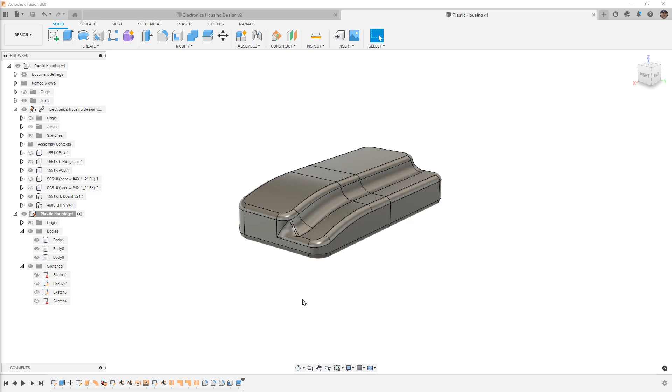In the last video, we did some concept work and played around with some shapes, and I talked about different ways we could use those to build our final design. Essentially we wanted to see how the concept phase could help us make changes and move the shape around until we got to a design we were happy with.

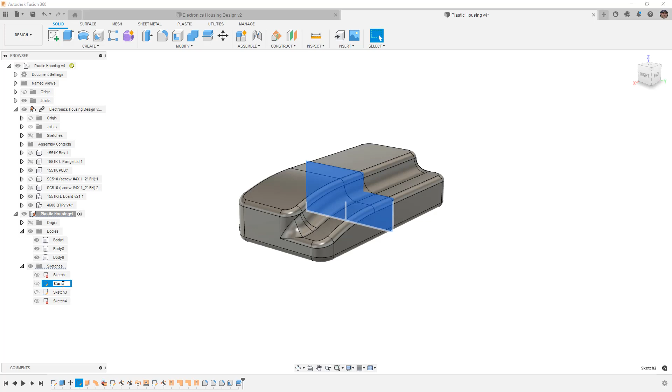But as I mentioned, we're not going to be using any of that concept work. So what I'm going to do is rename the different sketches to make sure we understand these were concepts. I'll label them concept 1, 2, and 3.

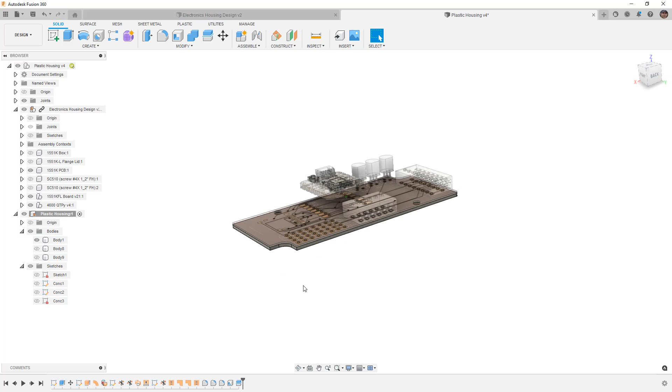Then I'm going to make sure I hide the bodies and hide those sketches. The one body left behind is the PCB, which we can keep if we want, but it can also be hidden. It's a good idea to rename it PCB.

And then I'm going to call this concept 1 and concept 2, just so I remember those bodies are there and they're part of the concept.

Now that we've played around with the concept phase and different ways to realize the shape we want, we're going to make a shape and talk about the actual plastic features that are needed.

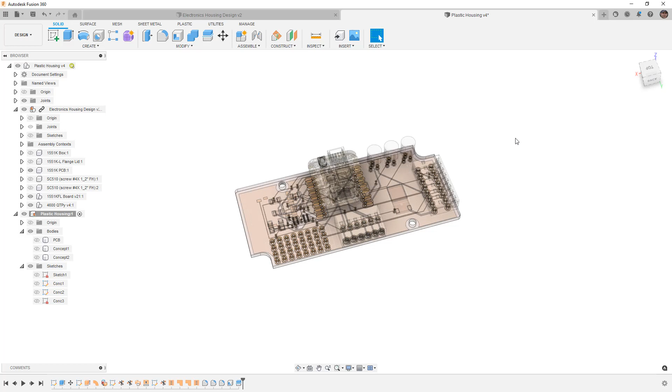When we look at this from the top, we have a PCB shape that we already know we're going to use. You can see we drew it over here and moved everything so that our origin or coordinate system would be at the center, and we have that PCB board.

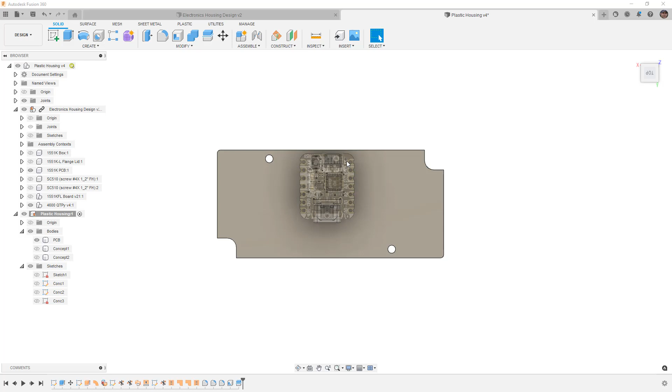So we can hide the actual board so it's a little bit cleaner. Note that we have the microcontroller, the Adafruit QT Py, in here, and we're going to need that information as well. But for right now, we can also hide that.

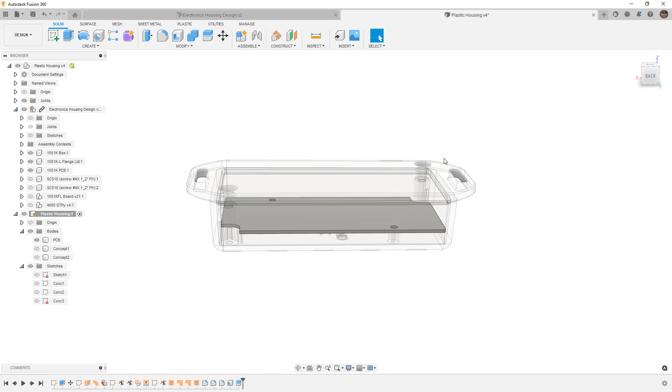What we're going to do is focus on the base of our design. We already talked a bit about the Hammond box we can get, with the lid and screws going down into this big boss here. What we could do is replicate that, or flip it around.

It really just depends on how you want the board and pieces to be used in the real world. We know where connectors are, we know we're going to need an opening on these two sides, and we know the QT Py has a USB-C and this quick connector.

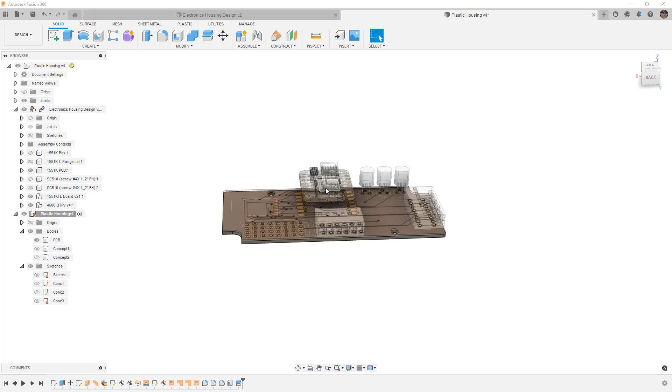And there's also this little reset button, so it might be helpful to have access to either put a screwdriver in from the side, or a little hole we can press down from the top to reset the board and restart it. So those are design considerations we need to be mindful of.

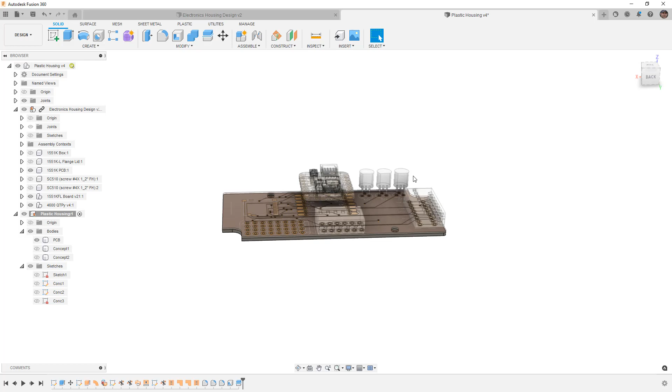This side of the board has the larger components on it, so we need to be mindful of that. The other components are all relatively small and minimal - there are some resistors and things on the bottom, but everything is pretty minimal except for this microcontroller and these transistors we need to worry about.

So when we look at this, we're going to get started. First I'm going to hide that and focus on this clean representation of the board. This is going to be the starting point for my housing.

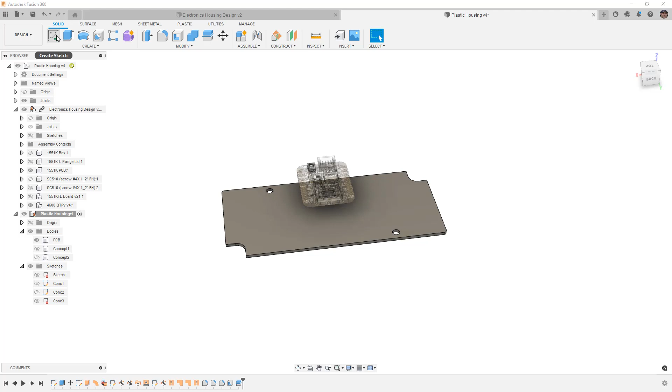So I want to start a new sketch and create it on the face of this, using it as the basis for my design. Remember I have the origin here, so I can use a center point rectangle and bring this out to make sure I encompass the entire board.

I don't know the dimensions I need just yet, but I want to use this and offset from the board a certain amount. So I'm going to use my dimension tool and just pick an amount that looks okay. Remember, we can make it as big or as little as we want, but making sure we have dimensions to drive it will be the important factor.

So I'm going to say 3 millimeters, and we can also create a user parameter or a variable at this time if we wish. For example, if this was board offset—oftentimes someone starts to type something, they want to simply do board offset. If you do the name, remember we can't have spaces, but we can use an underscore or capitalization to break words up. If you do the name and equals 3, then we've created that parameter.

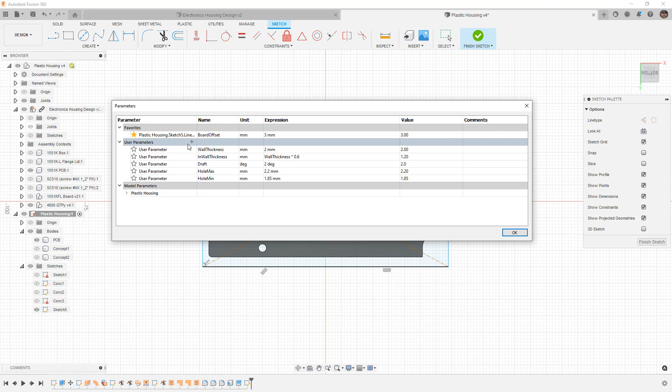If we go into modify, change parameters, you can see in our favorites it's located in the sketch. It's not at the top level in the user parameters, but the name is board offset, and now we can use that over and over again.

So in here, D on the keyboard to dimension—what we could do is click on this value and hit enter, and it'll be linked. Because we're using a center point rectangle, that's all we need, just those two values. We could also simply type in board offset; it would work the same as it does with user parameters.

Now that we have this base sketch, here is the time where we need to start making some important design decisions. Obviously we're not going to have square corners, we're going to have rounded corners. But do we place them as fillets in the sketch, or as features in the timeline? There are reasons why we'd want to do one over the other.

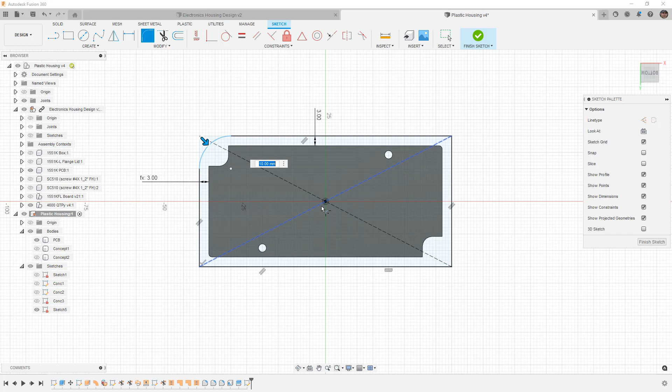If we try to use a fillet in here, keeping in mind that our center point rectangle is based on things like parallel relationships and equal distances offset from this board, notice this is going to affect those construction lines. So if I say okay and add a 10mm fillet, you can see this is fully defined, but now I get this 'constraints and or dimensions were removed' message. Even though it looks like it's still fully defined, it added tangency here—we lost the coincident relationship with that horizontal construction line.

So if we go around and do this in a couple different places, what ends up happening is we're breaking the relationship between these edges. I want to be very careful when I have a fully defined sketch and I begin adding fillets, because it causes problems, especially when it's a rectangle and not a square—it's going to be much harder to fully define that or figure out where those issues are.

So what I like to do in most cases is use a fillet after the fact, as a feature using the fillet tool, rather than at the sketch level. Obviously there are exceptions to every rule—in some cases you might decide doing it at the sketch level is better. But for this example, doing it at the feature level is a better option because it helps us keep a simple, fully defined sketch, and we don't have to worry about those fillets if we decide to change them later. It's going to be easier to change the fillet later as a feature in the timeline rather than at the sketch level.

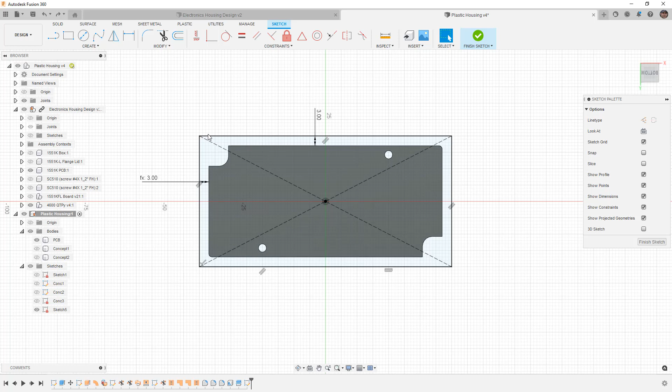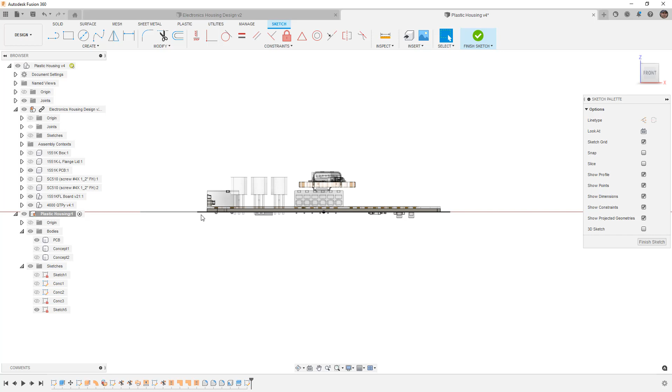Now that we've created this offset base, it's based off the bottom of that PCB shape. That's obviously not where the bottom of the housing is going to be, because we need bosses that we can use to attach the PCB to. For that, we need to look at our actual PCB to see things like components on the bottom and how much space we need. So what we have to do at this point is create a solid somewhere below the part, and figure out where that's going to be.

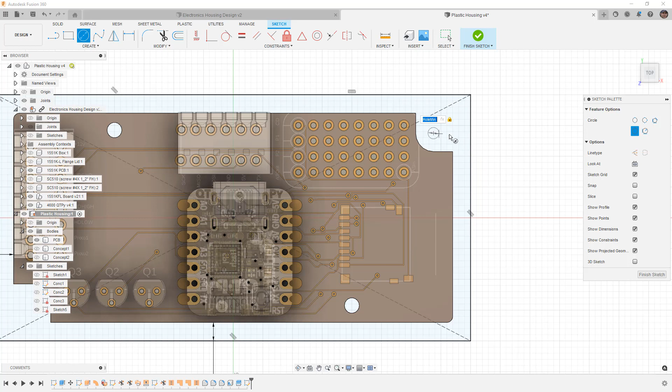So what I want to do is, in this sketch, figure out where those screw locations are going to be, and I'm going to add them even if I don't use them at this time. Remember that our screw has a min and a max diameter value. So I'm going to start typing min, and even though it starts with hole, you can see min comes up—so I'll use that hole min value. Then I'll add another circle, click, and use D for dimension. What I want to do here is use IN for in-wall thickness—this parameter determines how thick that boss needs to be.

And we can see that the screw size we're going to use and the boss or the plastic wall thickness is going to be just fine in this case.

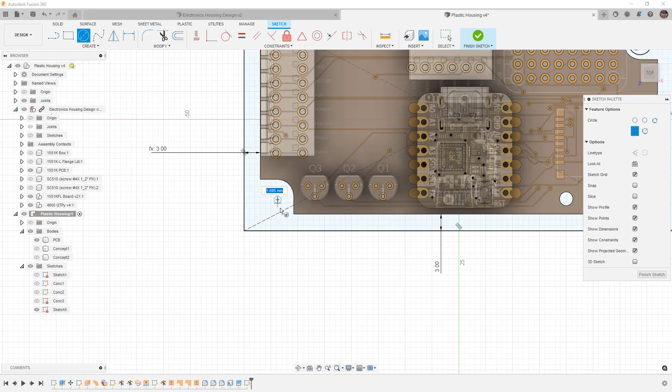I'm going to repeat the process over here, C for circle. And if you happen to miss the location or don't place the dimension, you can just drag this around until you find the center location of that arc.

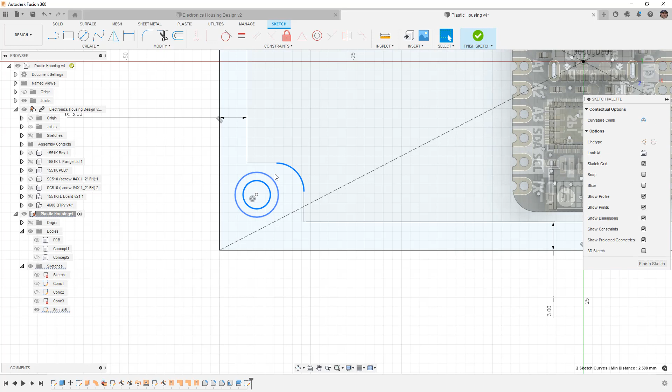Or what we can do is use the reference. Remember that this is the board itself, its shape is in our sketch because we clicked on it to start. So we can pick these and make them concentric. That'll automatically snap those center points. And then we can continue to use dimensions, or we can use equal.

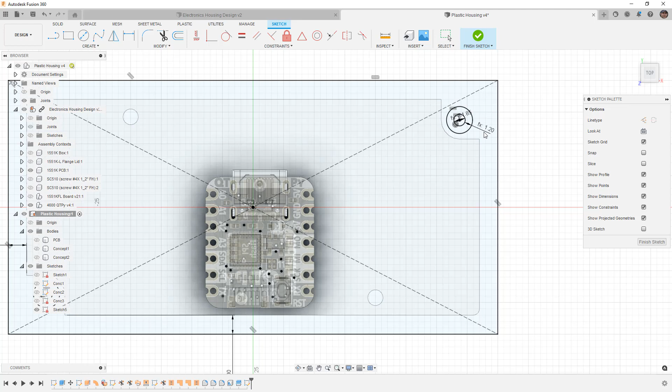Now, the important consideration here is to make sure that we're not adding additional dimensions or constraints or things that make it harder for us to control. If we decided later on that the wall thickness or the diameter of this hole had to change, we would want it easily updatable. We want it to change everything.

So we could go into modify, change parameters, and change the hole min value, and it would update the sketch. So let's take a look at this. I'm going to pull this up a little bit. If I say that the hole min value instead of 1.85 actually needs to be 2, I'll hit enter. It updates both of those.

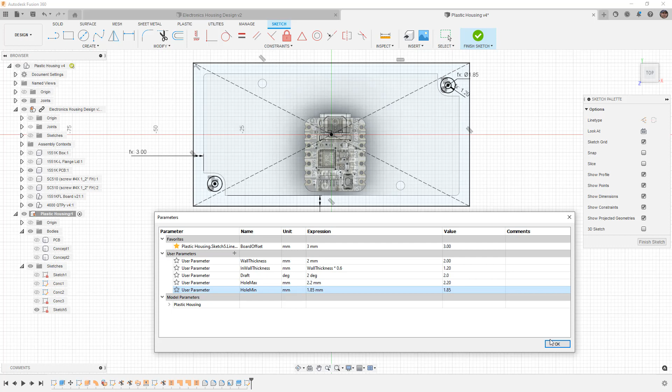Let's make it a bit more drastic so it's easier to see. You can see both updated. The wall thickness is still consistent because it's based on this in-wall thickness. I'm going to reset this to 1.85, but just note that linking these together, either through our parameters or through the equal constraint, means that it's easy for us to update.

And making sure that we define the wall thickness based on our parameter, rather than coming in and just putting a dimension in there like 2 millimeters, makes it easier for us to update everything downstream. These are going to be key to making sure that your design is flexible enough.

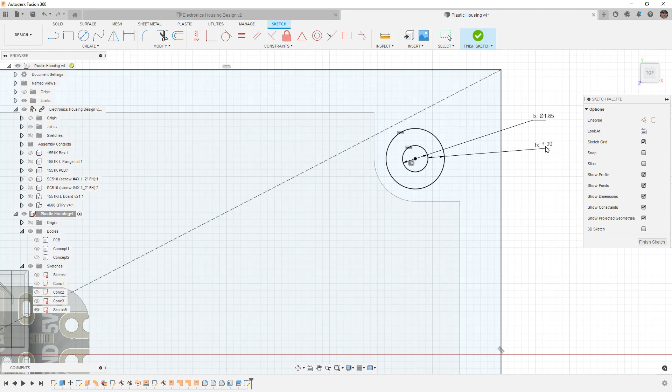So now we have the base of our design. We have this hole location and this hole location. The only thing we don't have is the location for the holes in the PCB, how we're going to hold the PCB down.

So we can use a couple tricks here. We can either put screw bosses to hold it down, or we can come back later and create some snap fit pieces that hold the PCB down. And these can be snap fits on the side of the board if we have the room, or they can go through the screw holes.

Putting screw holes or drill holes in PCBs sometimes can increase the cost. So keeping in mind that we have other options, for example, using snap latches on the sides of the board can be a helpful solution, especially when we're using low production volumes or prototyping.

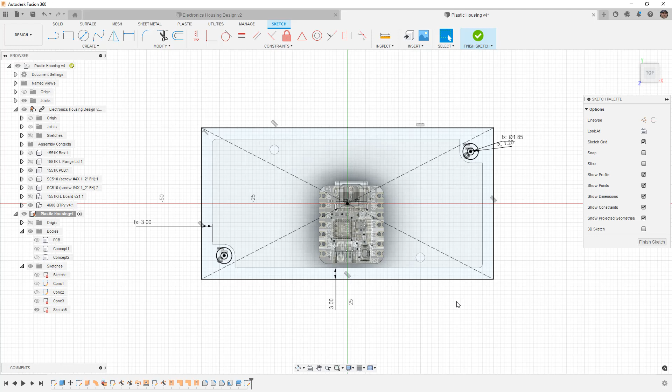So I think this is going to be the stop of this sketch. I'm going to rename it right away. I'll call this base sketch, and put a 1 after it in case I end up having more sketches that I need. This is also a good time for us to save to make sure that we have a version that captures this.

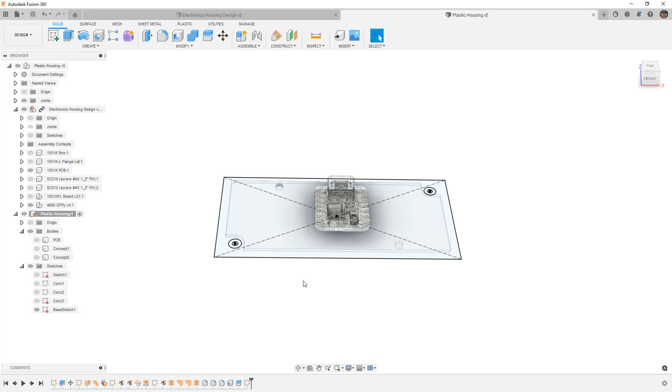So from here, now that we have the base shape, the next thing I'm going to do is bring back the PCB so we can see the components. And I'm going to create a solid base. I want to have a starting point that is a nice flat base.

We might change it later, I'm not really sure. But if we're going to consider something like 3D printing, then having a flat base helps us with the 3D printing. But if we're considering injection molding, the flat base really doesn't buy as much. But again, it's a starting point. I'm not going to worry about wall thickness right now. What we're going to worry about is the location of this.

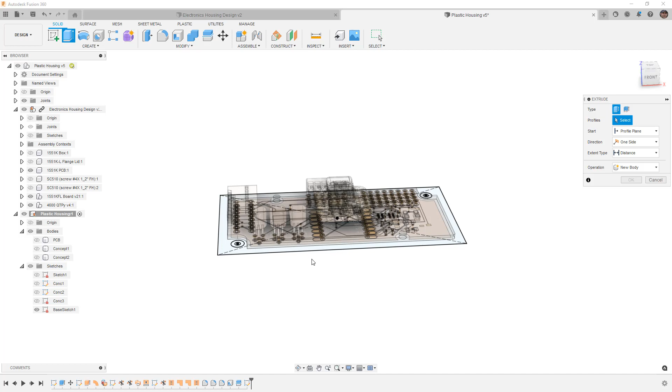So we're going to create an extrude. I am going to select all the profiles on the bottom, even the holes, I want to fill in everything. Because we use the bottom of that PCB shape as the sketch, it's going to have all those profiles in it. And then I want to begin by offsetting this. So instead of using profile plane, I want to offset it. Let's go ahead and add 2 millimeters and see where that puts us.

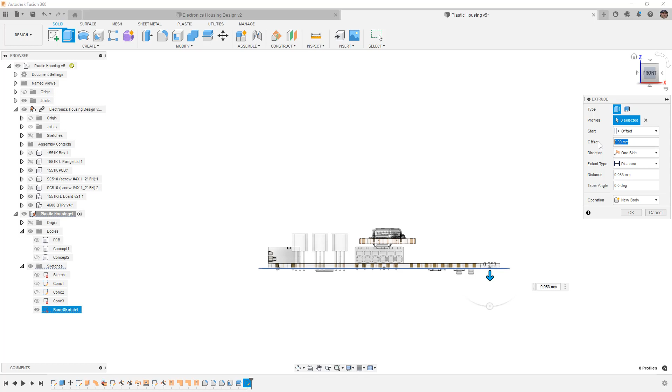You can see we're not quite clearing some of these components, so I'm going to increase that to 3 millimeters. Everything on the bottom of the board is relatively small, but we do have some larger capacitors and some chip resistors on the bottom that we need to be mindful of.

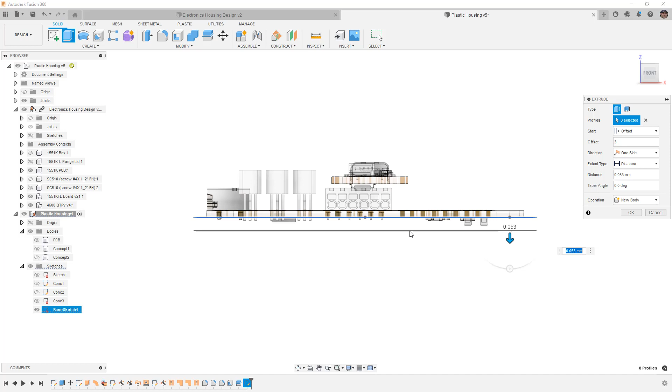Also, if you are prototyping these boards, if you're making something on your own, the ideal situation for leads of components to go through and the amount of solder that gets built up on them, those aren't captured in a PCB design like this. These are all ideal situations. Now, if you're dealing with surface mount stuff, you're pretty sure where that's going to be.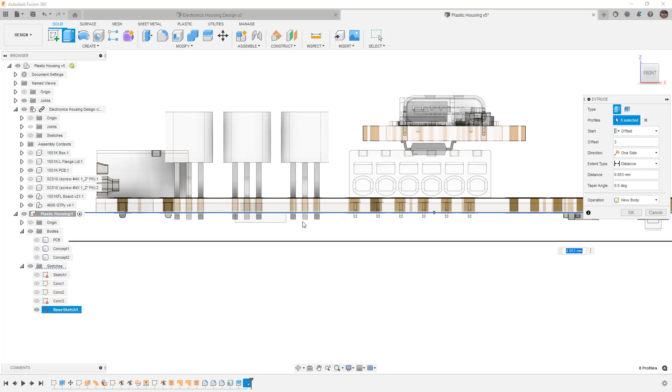But when you're dealing with through-hole stuff, I can actually push these down quite a bit more, force the leads through, solder them, and cut them off, which means that these components will be lower, but the solder and the leads on the bottom might stick out farther. So we need to just be mindful of those things.

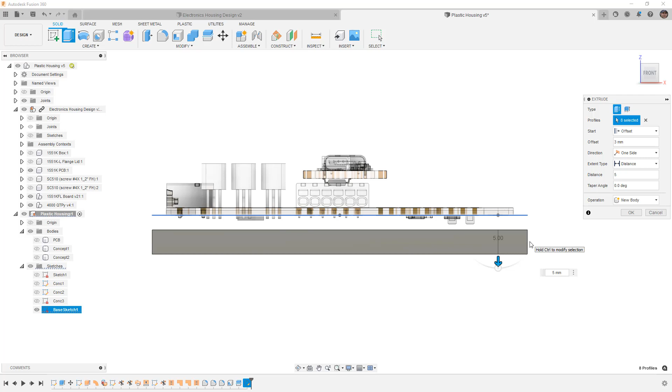You'll notice that the thickness right now is very small, 0.053. Again, I'm not concerned with wall thickness here, so what I'm going to do is make it 5 millimeters. The reason is I might want to come back and just change the shape of this. Later on, we're going to build a solid volume, we're going to shell it or thicken it if it's a surface, and then we can worry about the rest. But right now, really what I'm focused on is making the location of that inside face where it needs to be, and that's this one here. So I'm going to say okay, and now this is the basis for my design.

Now, at this point, note, I didn't add any draft, I didn't put the draft amount, the 2 degrees that we incorporated. I certainly could, but one of the reasons I didn't is, for one, I don't know if I'm actually going to use this body or not. And two, I don't know if the shape of this body is going to change. It might change, it might not, it might just stay flat. It really just depends on the design intent. But I'm not quite ready to add draft, even though I could in that extrude.

Once again, let's do a quick save. It's good to save often, and then we can add a little bit more detail.

Now we have our next design decision. So we built this solid body that's sort of the basis of everything we're going to do. But are we going to build the housing out of solids, or are we going to build it out of surfaces? There's really not a right or wrong answer here. You can choose any option that you're comfortable with. Surfaces give you a little bit more flexibility when you're making complex shapes because you can work one face at a time, whereas solids you have to work more broadly, you kind of have to build the entire thing. Generally, what you do is you build a solid and you might hack away at it, or you might build the complex shapes with things like lofts and different curves.

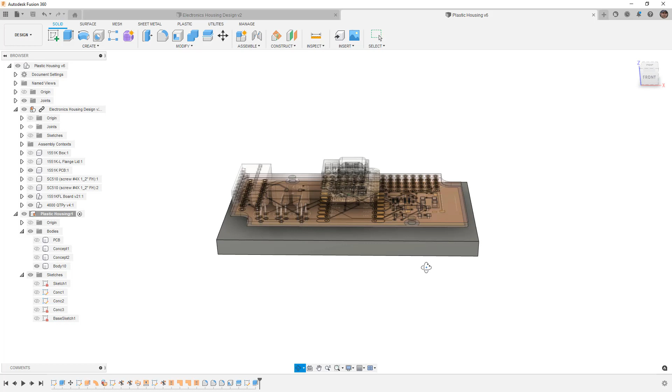So, because we really haven't covered much in terms of surfacing, I think I want to progress with this design using surfacing tools. Now that we have the basis for our design, this face, what I want to do is create a surface that we can use as the base.

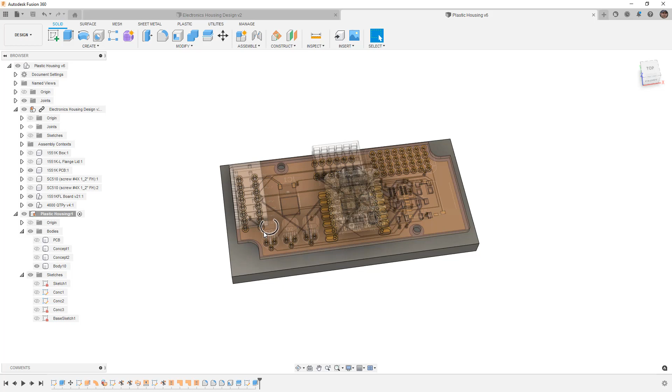Now, keep in mind when we're working on designs, we have to consider the end use. In this case, the intention was a headlight controller on one of my motorcycles, so it was using 12-volt input from the bike, which is why we have a voltage regulator here. And then it was using 12-volt input based on high, low, or off switches, which is why we have BJTs. And then it was using the pulsing of one of those to control the LED headlight. So we've got two for the inputs, and then we have one that was controlling the output.

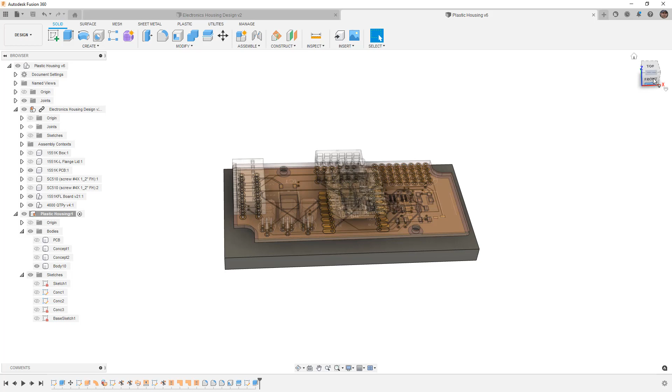So these three of them are not the same — two of them are the same, and one of them is different. This functionality means it was going to be zip tied on a motorcycle behind a headlight or bolted somewhere, which means the flat face doesn't really buy us much. It's not really important that it's flat unless we had a very specific location for it. Now, the flat face might help when we're prototyping, but generally you're not going to prototype with something inside of a final housing. When you make things like housings for Arduinos, they're big and flat, and generally meant to sit on tables or in project boxes.

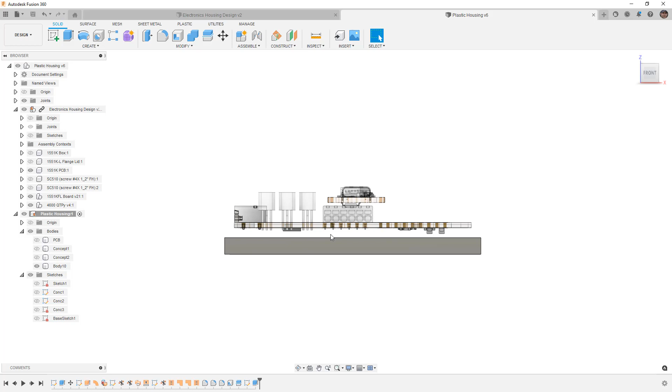This having a specific application, we don't really need to worry so much about it being flat. So what I'm going to do is create a sketch on this plane. Now I already know what the base shape is, I know the size of it, I know that this is 3 millimeters offset from the board, and I know where the hole locations are based on that sketch. This helps me define the inner constraint of that face. So I know that this point right here is going to be the inner constraint, the place where I need to put things like my bosses to hold the board and to screw it down or snap latch it.

But it doesn't have to be flat. The board is flat, which means any boss or anything that comes up to it should be flat, but the actual design doesn't have to be flat. That can be taken care of by the way in which we manufacture it.

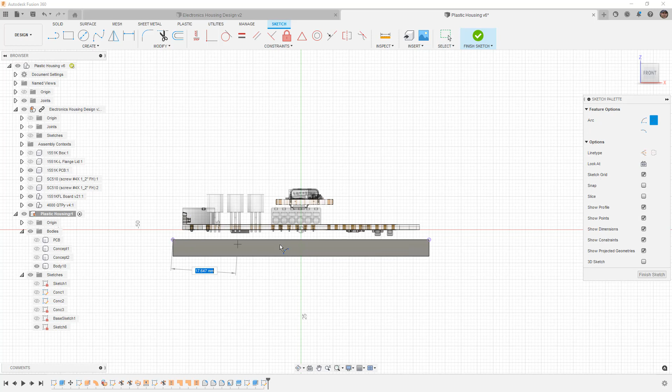So what I'm going to do is use Create, go to Project, Include, and Project. I'm just going to take these corner points, these references off the solid face, and say OK. Then I'm going to use my Create Arc tool, a 3-point arc, going between these two, and just draw a very gentle arc.

Now, remember when we're talking about injection molded plastics, we want to avoid flat faces when we can, because when they start to cool, they'll end up pulling in on themselves unless we add a bunch of different ribs and things on the inside to help with the structure or the strength. So a lot of times when you see things that are perfectly flat or close to flat, you might see sort of a web pattern on the inside, even if it's very minimal, a grid or some sort of web pattern. That's generally to give the surface or the structure some rigidity, some strength, so that it doesn't tend to buckle in on itself.

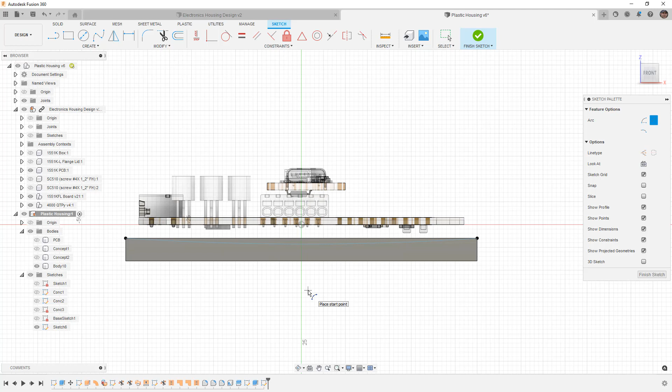So we want to have those gentle shapes, the very mild arcs and those gentle shapes. Anything that you look at, from your cell phone to your TV remote to any plastic part, you'll often notice that at least in one direction, they might have very mild curvature. It's not always the case, but if you have a big flat face, it's going to cause problems.

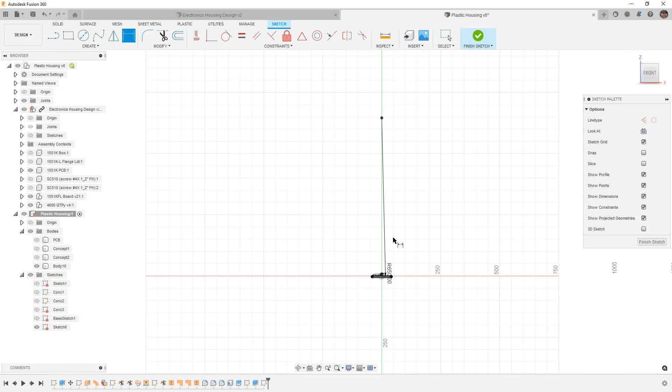Because we are designing for the final housing, we do want to make sure that we are fully defining everything. So I'm going to give this a very gentle arc, say 650 millimeters. That's really large, which puts the center point way out in space. That's kind of unfortunate when you're dimensioning stuff like this, but there are other ways that we could do it. We could use a spline or something else, but this arc is going to be nice and consistent.

We know that this point is 3 millimeters off the board. We know that this point is 3 millimeters over here. So we don't have to worry about the center - it's going to be centered on our origin.

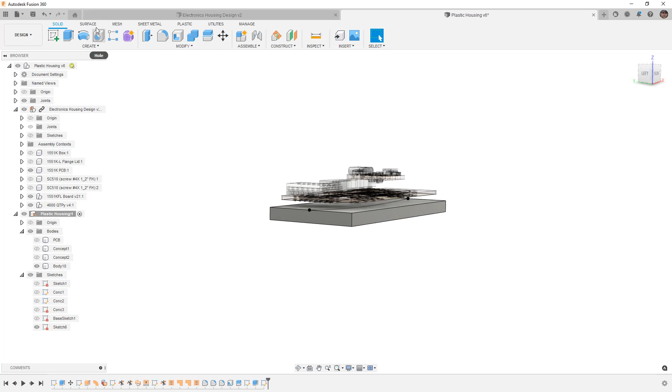Then I'm going to finish the sketch, and extrude this as a surface. So I'm going to say extrude, and pull it out. I'm going to make this go symmetric in both directions, and notice that I'm going past the extents of my housing. One of the reasons that we're doing this is because we need to build the surface from here.

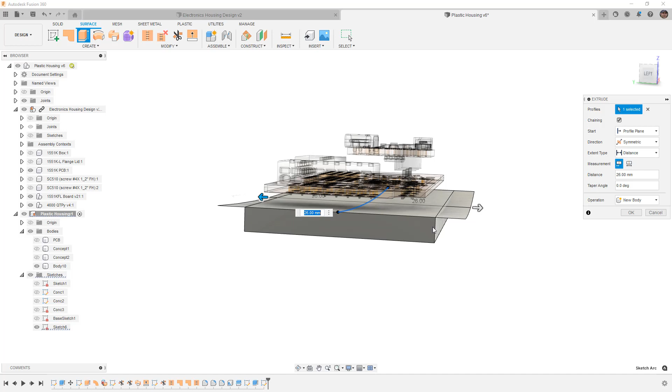There is another method, another way that we could do this, and I'm going to show both of them. So this one is extrude, but here is the problem that we get when we're going down this road - we can't fillet this corner because there is no thickness to it. We could create ruled surfaces off the edges, and then we could fillet the corners, or we could create a sketch to trim it. But when we do a sketch to trim something like this, it's not as robust as basing it off of something else.

So for example, if we were to come in and add an arc to a 2D projected sketch, the 2D projected sketch isn't accounting for the curvature of this face, which means that as we adjust things, as we pull them around in 3D, the curve where it's intersecting these two edges has the ability to change. So what we're going to do in this case, instead of the extrude, is fillet the solid body reference that we created. Then we're going to use our sketch to trim it.

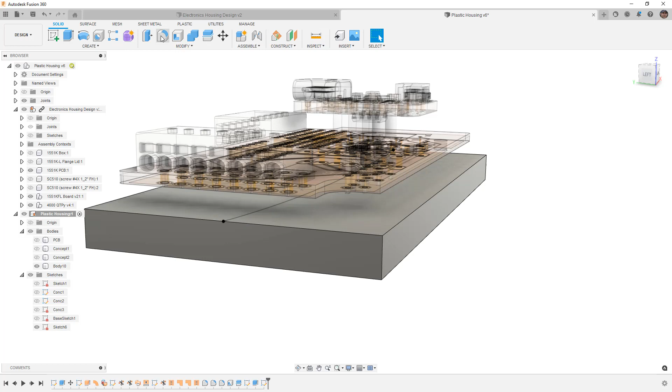So we're going to get rid of this extrude. I'll delete it, but we're going to keep this sketch, since it's going to help us define the shape. Then we'll go to our solid tools and fillet, or F on the keyboard, and we want to fillet all these corners. Keep in mind none of this has draft on it, so we're not worried about draft here, just the shape.

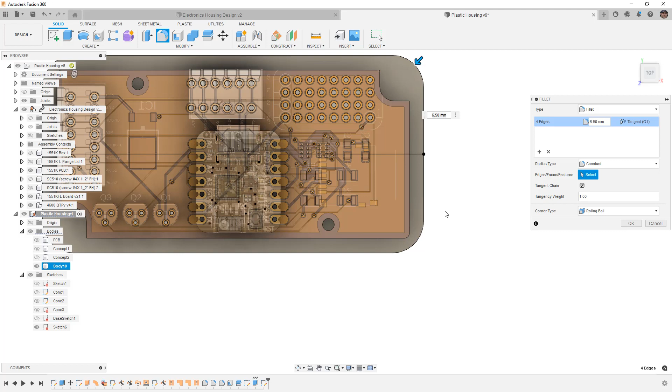In order to get the shape right, let's go to the top view and take a look at how it relates to our design. Remember, we're designing the inside face, so as long as we don't go over this corner here, it should be fine. If you want it smoother, more like an iPhone with very rounded shapes, you can increase it. I'm going to stick with 6.5 millimeters and build from there.

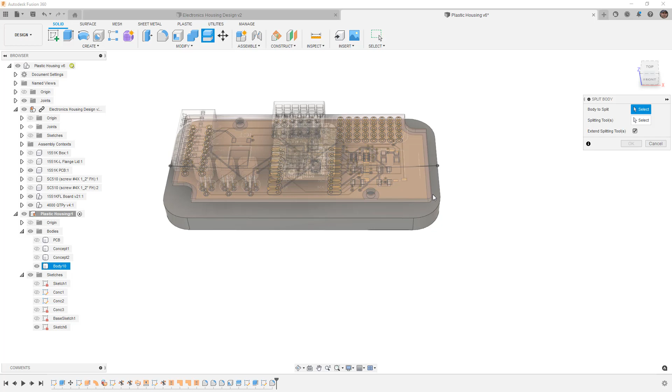Next, I'm going to use split body. Bodies to split is that base, and the splitting tool is the sketch we created. We'll say okay, and now we have two bodies in here - this big base and this little piece. Either is going to be fine, but I'm going to hide body 10, hide my sketch, and hide the PCBs as well. Let's get rid of all those, and hide this one too.

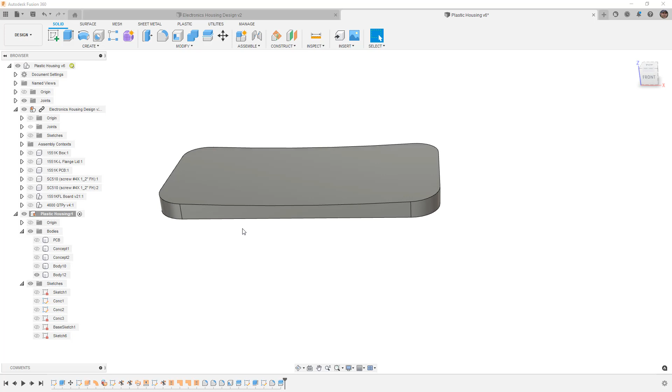So now what I have is that arced face. It's only arced in one direction because we did it from the front here, but now it has the fillets on the side. So what we can do in surfaces is go to create and offset it 0 millimeters. We'll say okay, and now we've got a surface body that has that curvature in one direction.

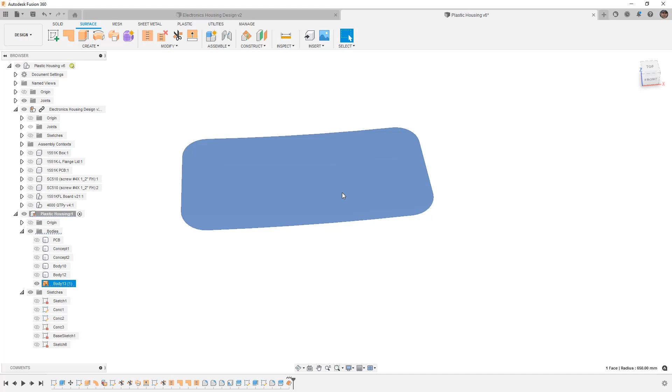Here's the other thing we need to be mindful of: what if we wanted that curvature in two directions? We couldn't use split body because that's going normal to the selected curve. So what would we do in a case where it needs to be curved in two directions? Let's back up a little bit, and I'm going to delete these. You're probably getting tired of deleting our work, but it's important that we go through the process and understand each of these steps.

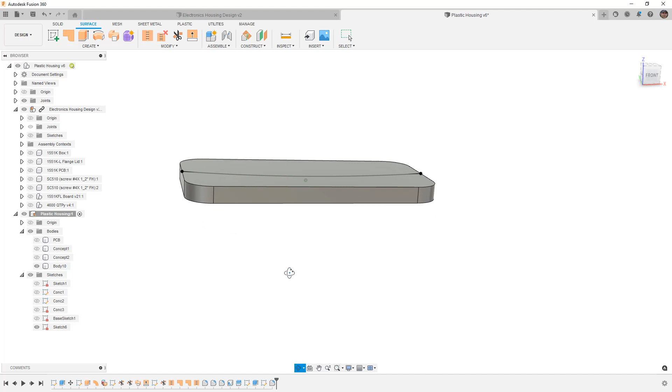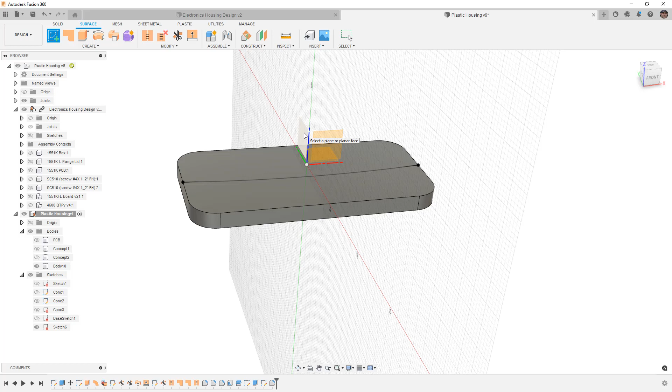So in order to get this to curve in both directions and meet these edges we already defined as the lowest point for the inside that we want, I'm going to create another sketch. Remember, our origin and coordinate system is based at the center of this design, and this is where it's helpful to have gone through those steps. So now I'm going to sketch here, using P on the keyboard. I can project these edges, which gives me that line, or I could use an intersection - that would work as well.

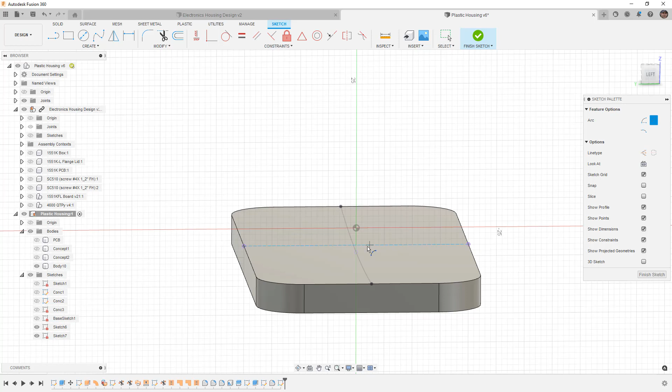Now we've got these points. We also want to intersect this, but we can't project it because we want the point where it crosses our sketch plane. So we need to go to project, include, and intersect. This takes our sketch plane and gives us a point wherever it intersects that curve. We'll say okay. Now we can use an arc, in this case a 3-point arc, and drag it down until it snaps to that point. So now that arc is fully defined.

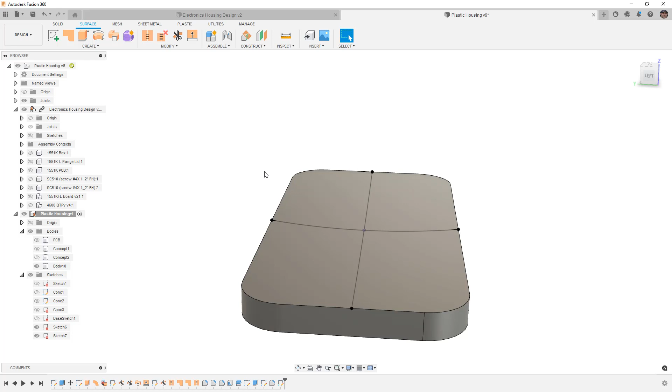In the case of creating a surface that fits here, we have to create something that can use both of those as a reference. Now this is where it gets a little tricky, because different software has different options. The way we do this in Fusion 360 is we create a sweep. We're going to sweep this edge, do a single path, and the path is going to be this one. This gives us that sort of bowl shape.

One thing you'll notice with this bowl shape is it doesn't intersect these corners anymore. That's because we're taking this arc we have here and pulling it up to this corner. So if we wanted to actually fit this shape, we'd need to get extremely creative. But again, we're not tied down to any specific design - we're not really concerned with matching a perfect shape of something that exists. We have some creative freedom here.

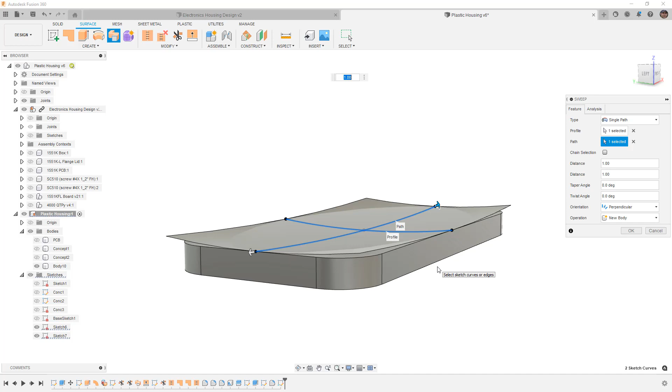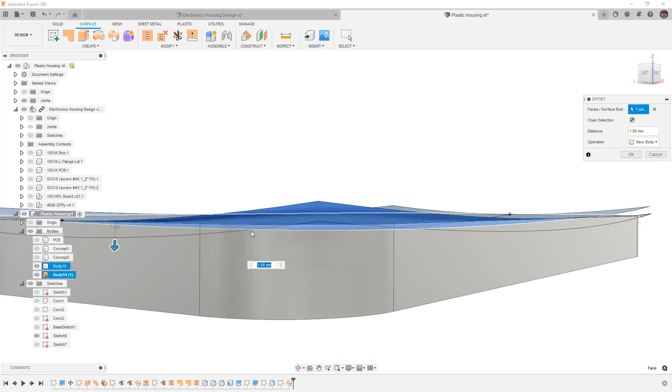So what we're going to do is take the surface we just created and offset it. We'll go to the side and pay close attention to offsetting this until it crosses these corners. As we rotate around, you can see it hasn't completely crossed yet, so we'll pull it down a little more. Now our surface is completely underneath at 1.5 millimeters, so I'm going to say okay.

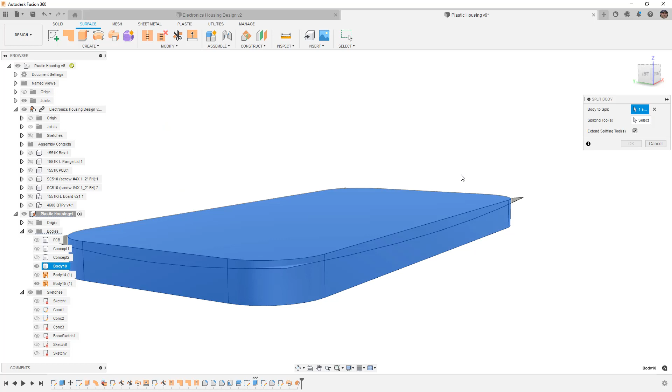I'm going to hide the original, and then use this new one to split my body. We'll go to Modify, then Split Body. Body to split is this one again, and the tool is going to be our surface. It doesn't need to be extended because it already goes to the extent of the surface, but if we do that, it'll just push it out a little further. We'll say okay, and once again we've broken this body up.

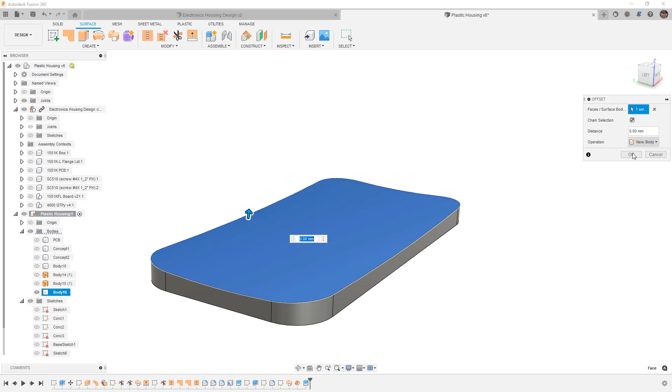This gives us a nice clean face that we can offset, again at 0 millimeters. So now we have a face that is curved in two directions. If we look at it from the front, it's curved this way. If we look at it from the left or right, it's curved that way. And we have these rounded corners. So doing it this way takes a few extra steps, but it gives us the basis for our design.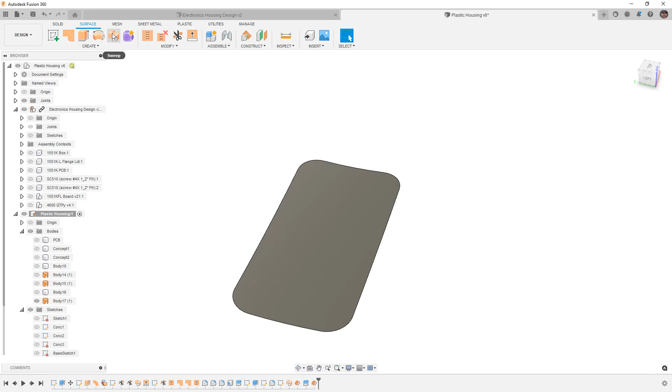We want to have good, clean surfaces. Doing it this way, creating that sweep and using those curves in two directions off of the solid body that we were able to fillet at the corners, is going to give us a nice, clean design. We have a single arc in this corner, a line, arc, line, arc. Well, these are all arcs or polylines, but this gives us a nice, clean surface starting point.

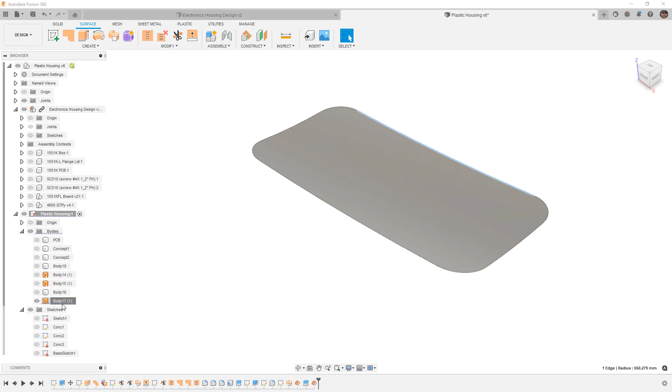So let's go back to a home view, and I'm going to rename this body. I'm going to call this base start. The rest of the stuff I don't really need, though I could keep some of it if I want. For example, if I needed to keep this face to use as a sketch plane for the start of a boss, I can certainly do that.

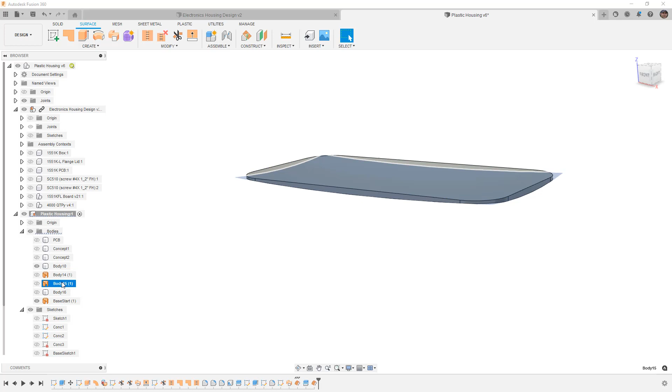The bottom part isn't really that important, and these other surfaces aren't really that important, at least at this stage. So if I want to get rid of them, I can right-click and remove them. I'm going to get rid of the original concept because I don't need it, and I'm also going to get rid of these two as well as the bottom piece, right-click and select remove. When we do that, it's going to place these in the timeline.

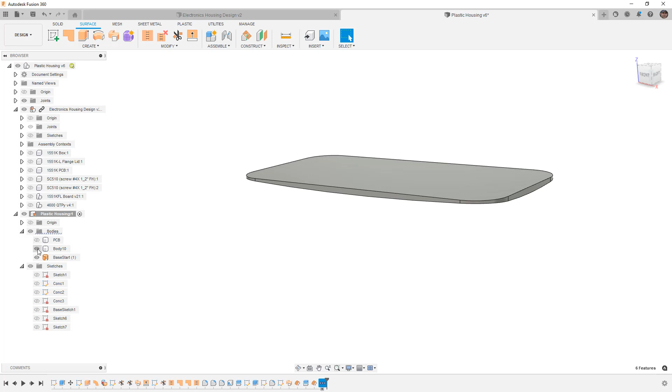I'm going to shift-select all of them, right-click and create a group, then right-click and rename it base remove. The reason I'm doing that is because now if I hover over it, I can see the name, base remove, and all the things that were removed. Notice that the removed bodies are named body 16, 15, 14, concept 1 and 2 — having those originals named something helps us identify the removal. The bodies 14, 15, 16 don't tell me much, but concept 1 and 2 help me understand what we did.

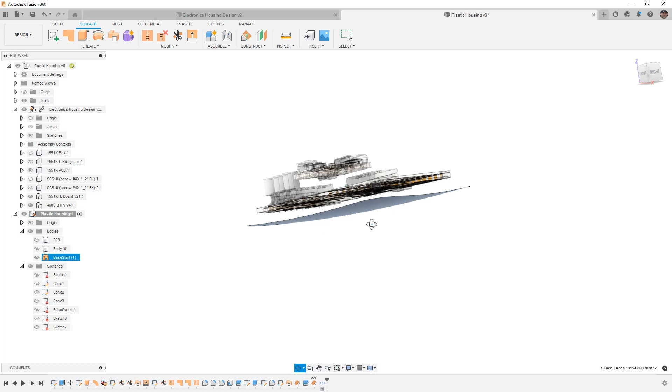So now we have this curved base, our PCB, and the microcontroller, and this is going to be the starting point for our design. We've got a nice clean surface that's going to be our starting point, and now we need to build the shape around the rest of it.

Now, you're probably already starting to realize that there are a lot of decisions we make along the way, and every decision has a consequence, either a pro or a con, something we're going to have to deal with downstream. So we spent a lot of time exploring a couple different methods of creating the base or bottom shape for our housing, because we need to understand those design decisions.

We could have very easily started with a flat plate and just used an extrude that was our wall thickness and built up from there. That would have been an easy option, and if we were 3D printing, that's the way I would go — I would want a nice flat base to help me 3D print it.

If we're trying to make something that has a little bit more appeal, a little bit more shape, we'll need to understand the differences between just extruding a curve, splitting a body versus trimming a surface, using a face off of a solid body, or creating something like a sweep with curvature in two directions. They all have different implications, different uses, different reasons why you would want to do it.

This bottom face is going to give us strength in our plastic housing. Because we ended up offsetting it 1.5 millimeters, when we thicken it, this could be the outside or the inside of our design. It really doesn't matter at this point—because we have so much space here, it could simply be the outside and we thicken it toward the design. We won't know for a little bit.

We can always go back and change things like the sketch we used or the offset surface that determined where that was located. So all of these can be different design points or different design changes. What's important is that anytime we have something critical we might need to go back to, we should label that sketch, feature, or group in the timeline.

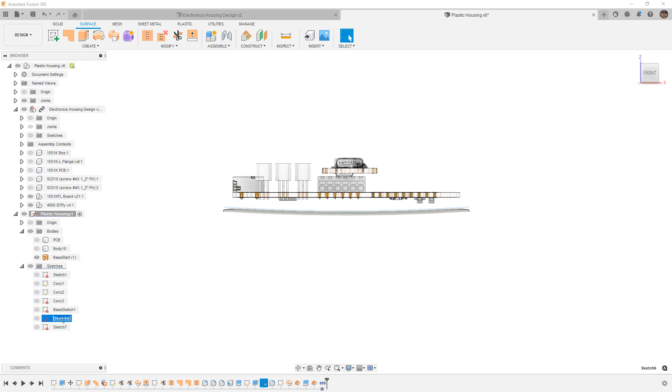Sketch 6 and Sketch 7, I'm going to rename—this one side base curve, and I double clicked on it so it went into edit mode. I'll call this one front base curve. Now if I'm ever looking back through and come across the sketch in the timeline or in the browser, I know exactly what it is, and I don't have to wonder what Sketch 1, Sketch 2, Body 1, Body 2 was.

This Body 10, I'm going to rename. I'm going to call this one Base Remainder.

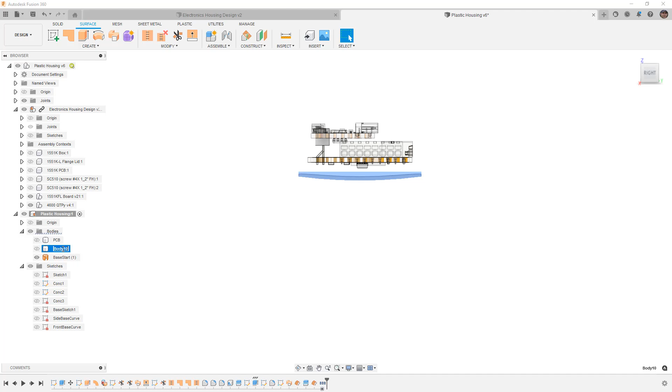As you do this work more and more, you're going to come up with some nomenclature that makes sense to you, whether it's using the same terms over and over again. And honestly, I'll sometimes forget or just skip the naming stage. If I'm the only person who's going to see or work on a file, it's not as important to rename those, because I can go back and remember the steps I took to get there. But if you're working on a project with other users, if you're sharing your designs, if somebody else has to do some step in the process, then taking the time to do this is important.

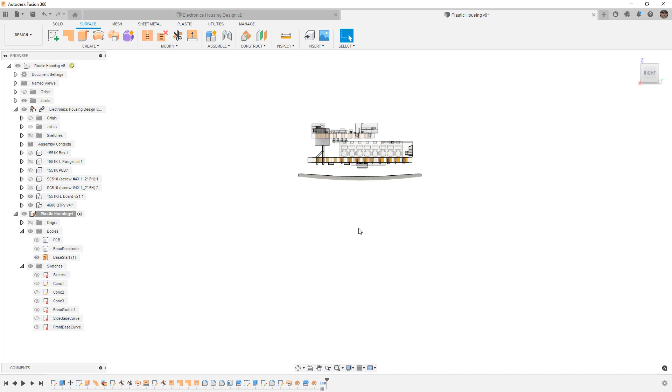There are a couple more critical steps that we need. The first thing I'm going to do is show you how to divide up the base that we created. Even though we've got this nice clean surface, we're working with symmetry. We know our origin is based in the middle of this design because we created our sketches directly on the YZ and XZ planes.

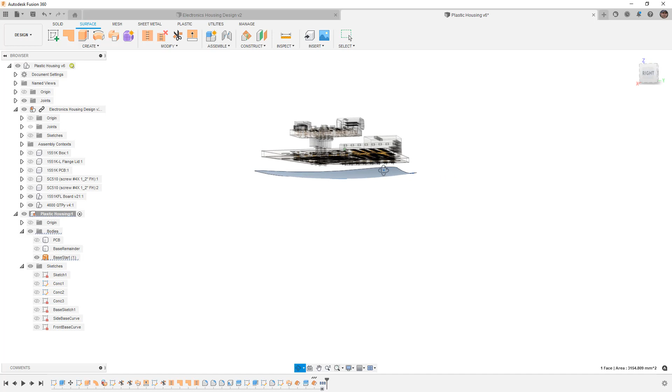So we're going to use that to our advantage and model this in quadrants. This is generally the process you take, noting that our design internally is not symmetric, but sometimes you make designs symmetric even though you've got wasted space on the inside.

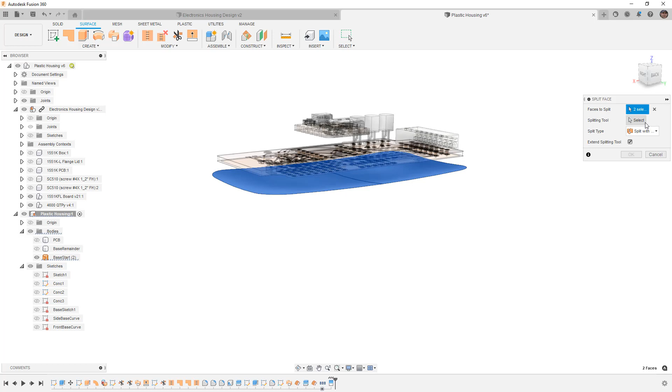For purposes of downstream functionality, I'm going to go to Modify, Split Face—not Split Body—and select this. My splitting tool is going to be my plane, in this case YZ. I'll say OK. I'll repeat that, select both of those faces, and now split it this way, say OK. The reason we're doing this is because as we build out the rest of this design, now we've got reference edges for curvature and reference vertices for snapping geometry to.

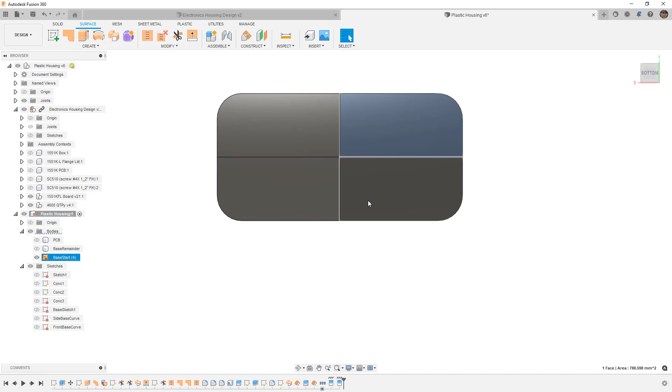Each of these quadrants is identical. If we just drew one and mirrored it across the XZ plane or the YZ plane, it'll perfectly match, and that's how we want to build—with the least amount possible—because then it lets us control the curvature at those mirrors. We know we're going to need tangency going across, or curvature, which means we can build out control surfaces and help us control that.

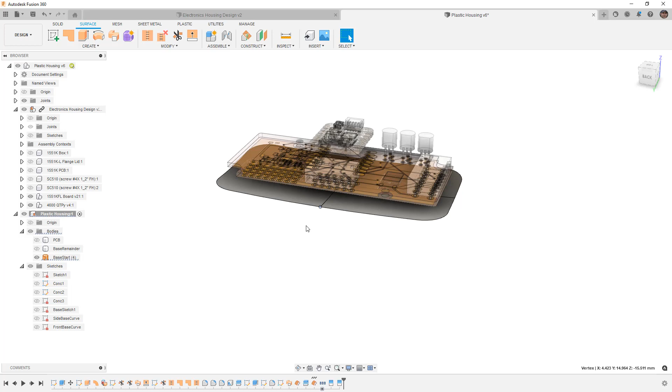But since this is a pretty big topic, I think this is a great place for us to start. So I'm going to save my design.